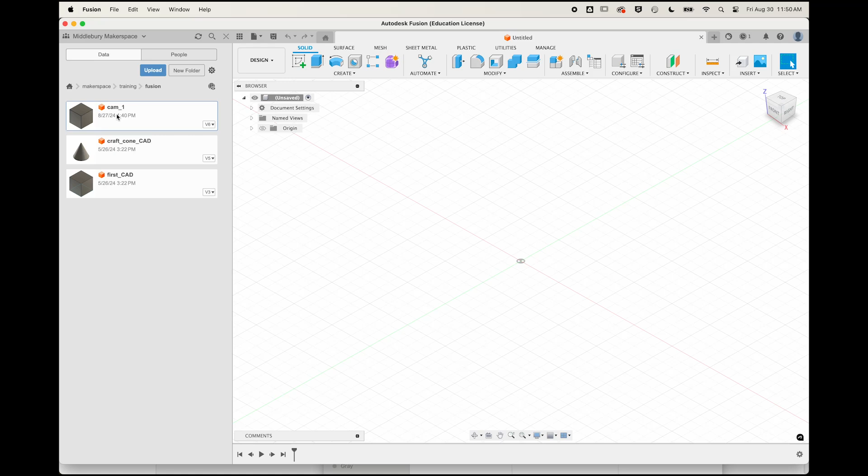Okay, let's turn our cube into a six-sided die by drilling different patterns of dots into each of the six faces. This will introduce the topics of center drilling, and Fusion parameters, all of which are really useful tools.

Open up your previous cube file in Fusion and add a new sketch and place it on the top face of your cube. Change your line type from normal lines to construction lines. Construction lines are going to show up as dotted lines, and you can think of them as light pencil marks that help you place and orient real lines, real features.

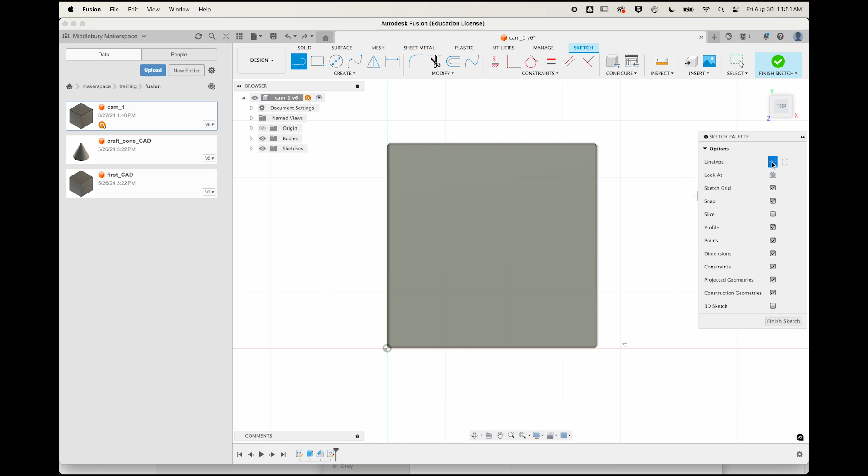Then change to the line tool and draw a vertical line perfectly centered on your cube and a horizontal construction line perfectly centered on your cube. And you'll know they're perfectly centered because these little triangle icons will show up.

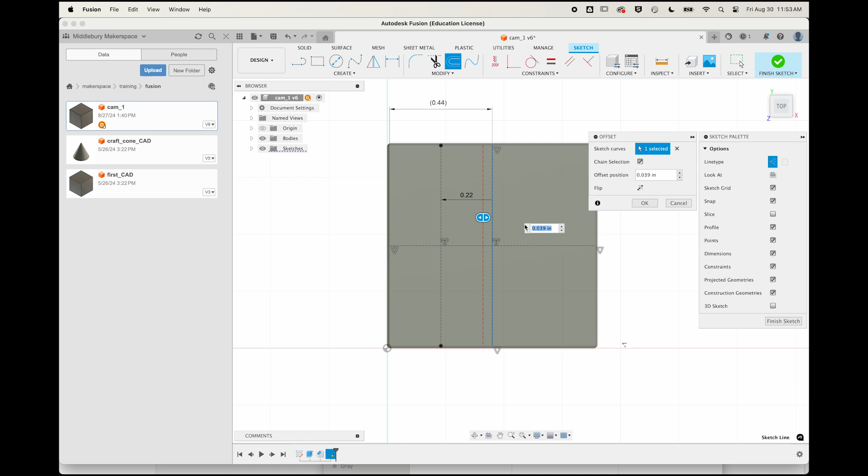Then change to the offset tool and click on this vertical line to offset a new line from it a certain amount. Let's offset it 0.22 inches, about a quarter of the way across our cube. And with that same offset tool, offset another vertical line the other direction, negative 0.22 inches. And again horizontally, 0.22 inches, and again horizontally, negative 0.22 inches.

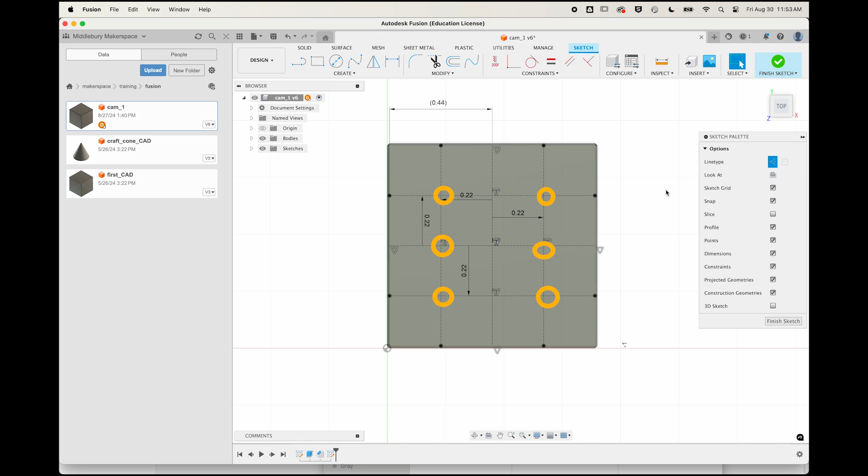I'm starting to imagine those 6 dots on the side of the die representing the number 6, but I'm feeling like they're too squished into the center, and if you're like me, you might be starting to feel sad because repositioning each of these intersecting lines means changing the 0.22 inches 4 times. What if I change it and still don't like it and have to change it again and again? Isn't there a better way to arrive at a feeling that all my intersections are at the right spot?

Well, that's where parameters come into play. And if you remember all the way back, that's why Fusion is a parametric modeling tool. It's a really powerful part of the tool set. So let's rebuild these parametrically. Go to the Modify menu and come down to Change Parameters.

Hit the plus icon to make a new user parameter and give it the name Spacing. You can give these any name you choose, just make them clear what their intent is. In the expression field, you can get really complicated, or you can just put a number. Let's just put a number, 0.22, and click OK. Now I've got a user parameter called spacing, whose value results in 0.22 after calculating the expression.

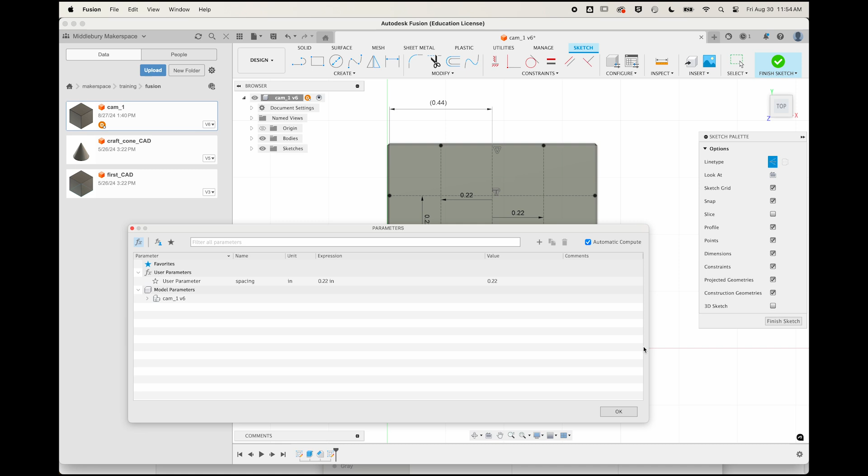Let's use that instead of this hard-coded 0.22 that we typed in 4 times. Double-click on one of those 0.22s to edit it and type spacing, and notice how our user parameter spacing pops up. Hit Enter, and you'll see this little FX show up next to 0.22. That's your clue that we're now drawing the data out of the spacing parameter.

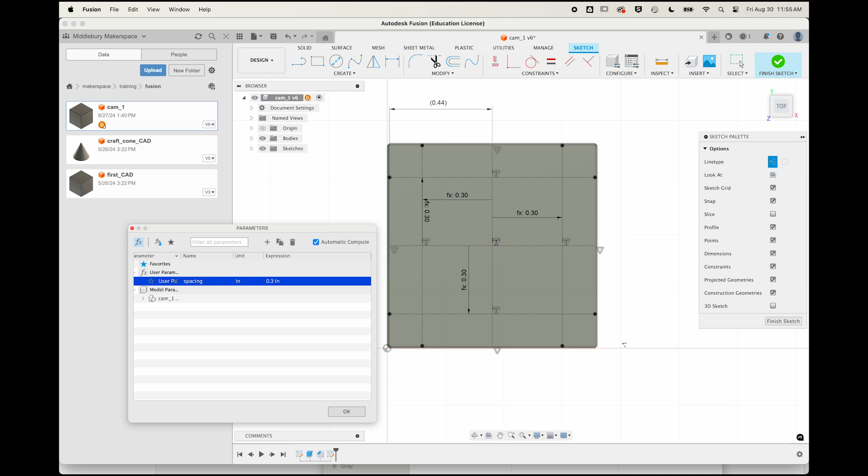Go ahead and add it the other 3 times, and when it was supposed to be negative 0.22, write negative spacing. And when you've got all 4, go back to the Modify menu and choose Change Parameters again, and this time change your parameter. Change it to 0.25, and notice how all of your spacings change to become further apart. Change it to 0.3, and notice how they change to become even further apart. This is the power of parametric modeling, one parameter to control many changes in your model.

Click OK, and now let's do something with those intersecting construction lines. Go up to your Create menu and choose Point, and place a point near this intersection, but not on it. Just make sure that it's clear that you're not on it to begin with. Then come to your Constraints panel and choose the Coincident constraint. Let's make this point coincident to this horizontal line. So click to activate the Coincident constraint tool, then click on the point, then click on the horizontal line.

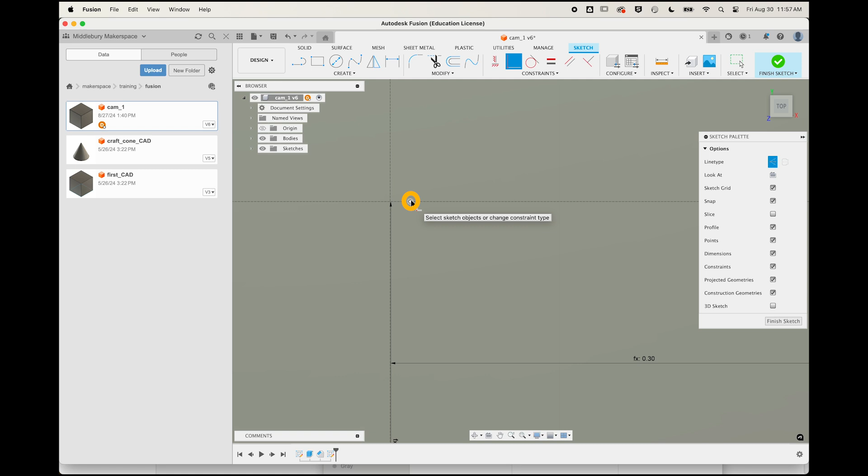This makes the point coincident with the horizontal line, but we don't have to stop there. We can make it coincident to other things as well, like this vertical line. Click on the point again, and then click on the vertical line, and now that point is coincident to both. And the only point coincident to those 2 lines is the point of intersection. Now, wherever those lines go, whenever we change our spacing user parameter, that point is going to come along for the ride. This is powerful.

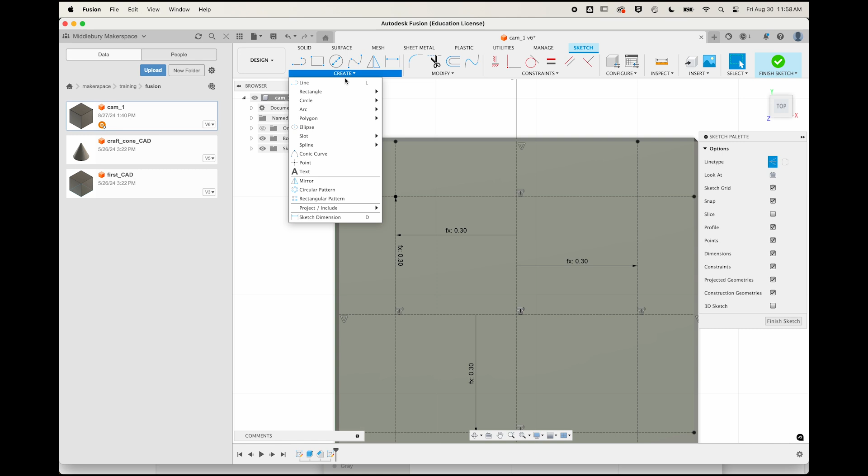Good. Go back to the Create Point tool and add the other points needed for the number 6, and go ahead and add the point in the center while we're at it. And then use your Coincident constraint tool to make each point coincident with the 2 lines needed to snap that point to the intersection of those 2 lines.

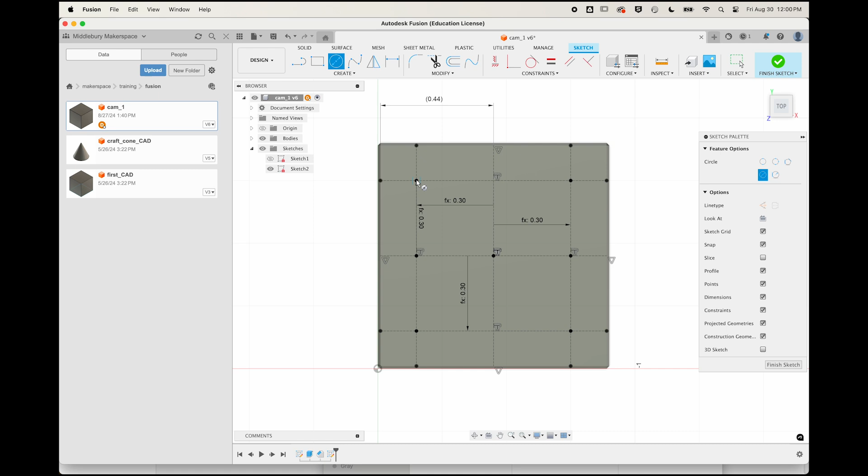And now let's create a bunch of circles whose center is that point and whose diameter is 1/8 of an inch, 0.125. And as soon as I say a bunch of circles, that should get you thinking about those user parameters again. So go ahead and modify, change parameters, add a new user parameter called dot_diameter, whose expression evaluates to 0.125. And then double-click on your hard-coded 0.125 and change it to dot_diameter so that it is expression-driven, parametric.

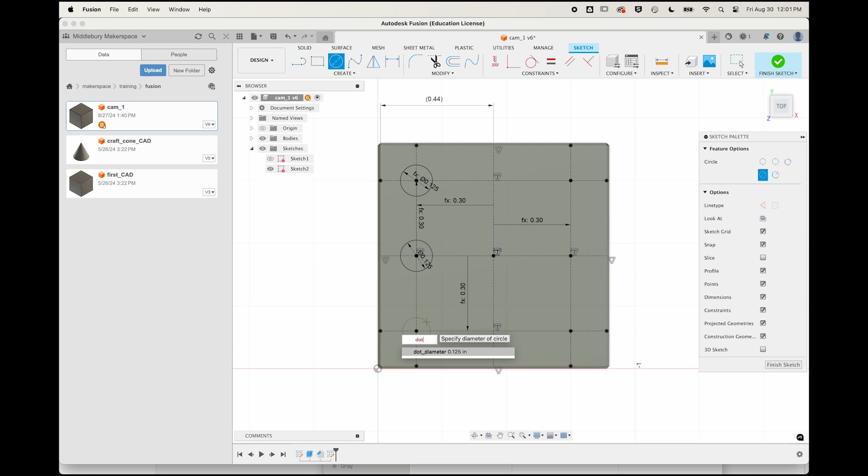Now, one quirk of Fusion, I tried to create the other circles and just type in dot_diameter immediately, but it didn't stick. It gave me 0.125, but I didn't get the little FX in front of it, and I didn't notice until I had made all of these. So I had to go back and double-click on those 0.125s and type dot_diameter. I don't know why it doesn't work the first time. I hope the Fusion developers notice and fix this quirk.

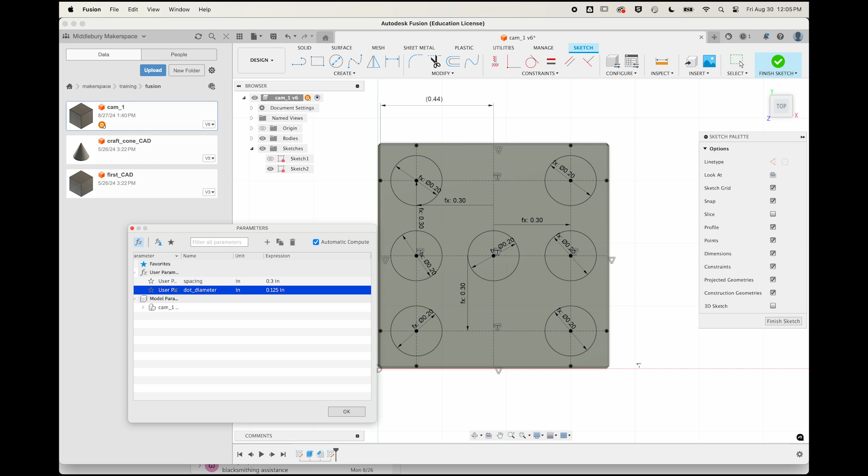Now, if I bring up my user parameters window, I've got essentially a control panel here where I can make my dots bigger or smaller in diameter and the spacing between the dots bigger or smaller until I arrive at a look and feel that I'm satisfied with. The one thing that I'm not going to change this time around is the diameter right now, because the tool that I want to use to make these dots is a 1/8 drill. That's not going to change.

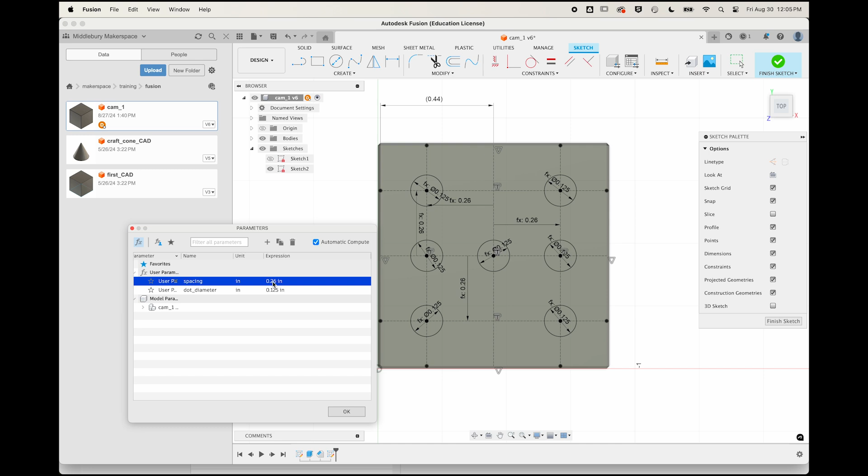But I do want you to see that it's possible to change these diameters along with the spacings on the fly. And I also want you to see how cool it is that you can bring a whole shape along for the ride as those intersections change position. Next up, we're going to talk about how to build the CAM for all 6 sides of the die without bothering to move this sketch onto all 6 sides in 3D.